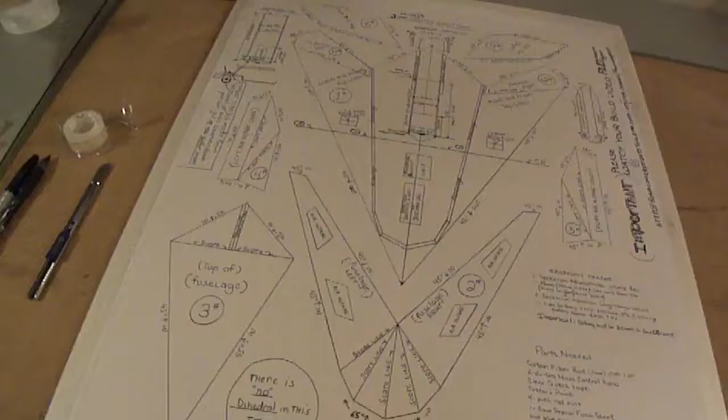Alright you guys, we're going to get busy cutting out our F-117 stealth fighter. You can use a 30mm or 28mm EDF jet.

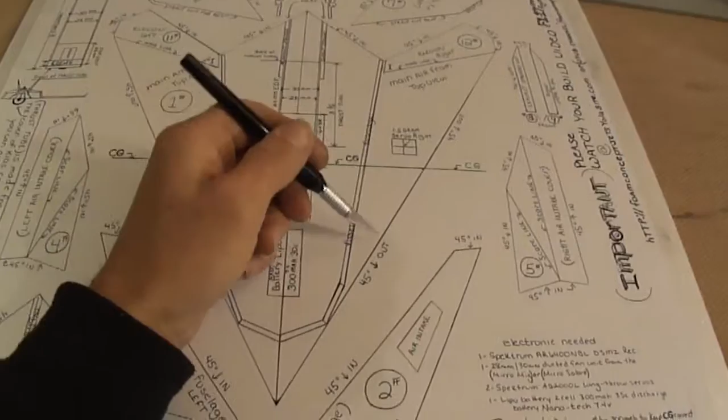I was going to go over a few things first. I started putting notations on here: 45 cut outward means you cut on your line going that way. And anywhere you see a 45 in, that means you cut in. I'll start putting this on all my plans, that way it makes it a little easier for you.

Alright, let's get started. I tape my sheet down on my foam board. Like I said guys, always use the bow, put the crown at the top. These sheets come with a little bow in them, so you want the crown at the top. You'll see one side of the sheet is smoother than the other, but I always like to put the crown at the top. It makes the plane, when you build it, have a better airfoil shape.

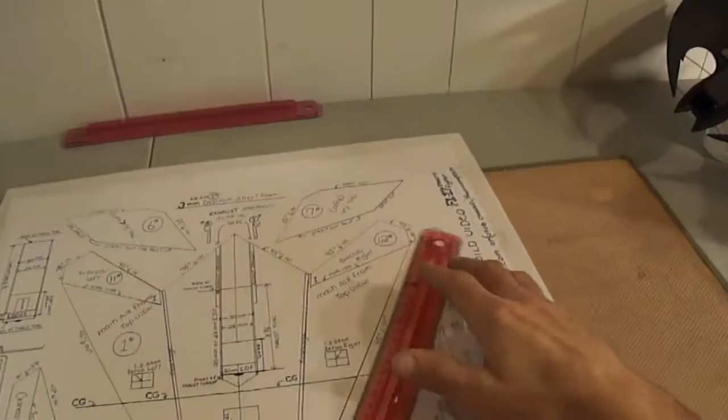Alright, let's start with the main airframe. I'll go ahead and cut this out. As you can see, it's a 45-degree cut with an arrow pointing that way, so we're going to put it on our line. Let me get a different knife.

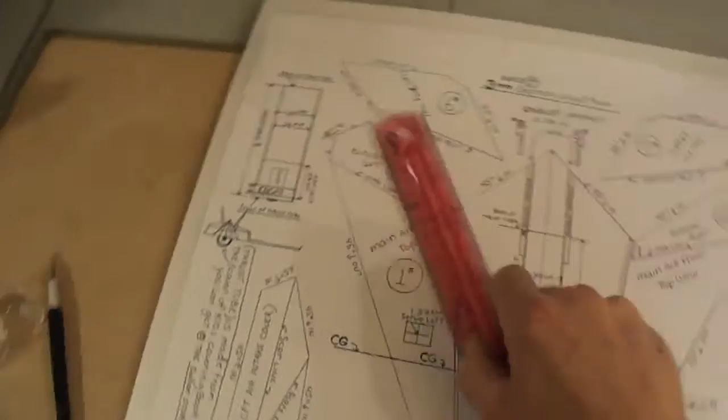I'm going to go ahead and do my 45s on the main airframe first. I numbered all the pieces. I'm going to try to get through this a little quicker than my other videos too.

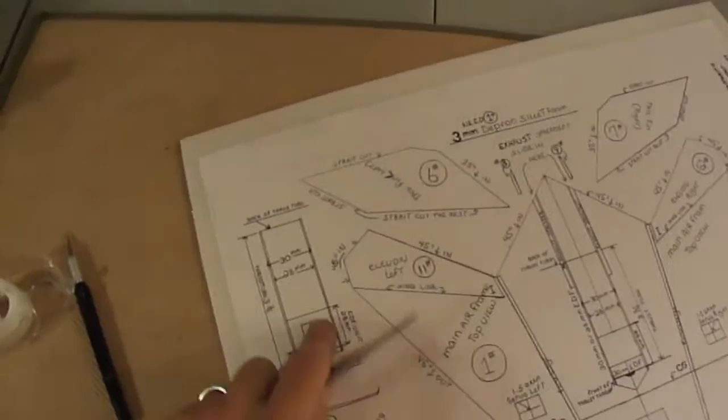Alright, for your elevons, those are 45 inward.

Turned out to be one cool jet. I love flying it.

Again guys, I'm just doing the 45 with the arrow pointing that way, so I'm cutting 45 in toward the inside of the fuselage, or the main body of the plane.

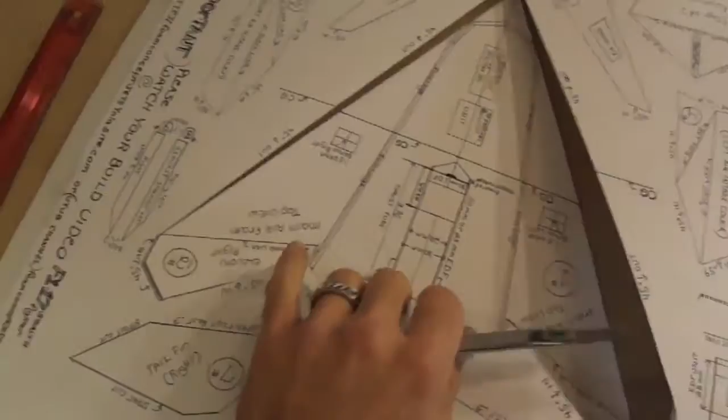Alright, so we cut out our main airframe. Just go ahead and put that off to the side.

We'll move on to piece mark number 2, which is your fuselage. Here we got a 45-degree cut in toward the piece.

And if you guys want, you can do more than the 45-degree angle on some of these. I even got it marked in some places where there's a 65-degree angle cut. You can make it 70, 75 - kind of the more the better.

Right now I'm just working on the main fuselage part.

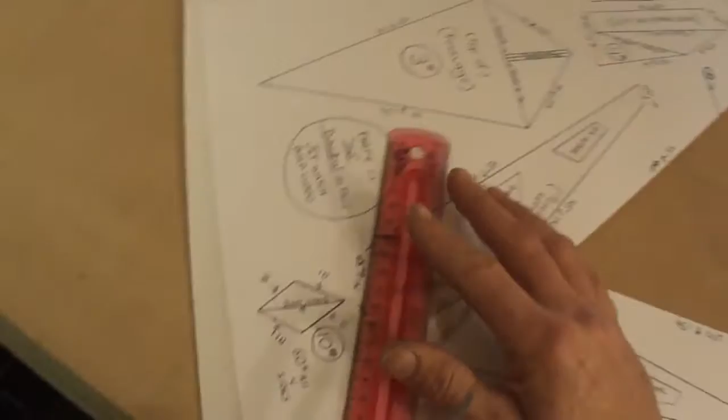Alright, now these are all on the front of your fuselage, which is kind of your canopy front end here. We're going to do 65-degree cuts, all 4 of these, angled inward. Like I said, you can make them a little more too, kind of the more the better. So if you want to go 70 degrees, that works too.

Alright, now on these canopy lines here in front of your fuselage, you're just going to want to score them. I would only score about halfway through them too. You don't have to go real deep, just a nice little score is fine.

Again, I'm just scoring all these. You don't want to go all the way through. Don't care about that paper moving, already on it. Alright, this is your main fuselage piece.

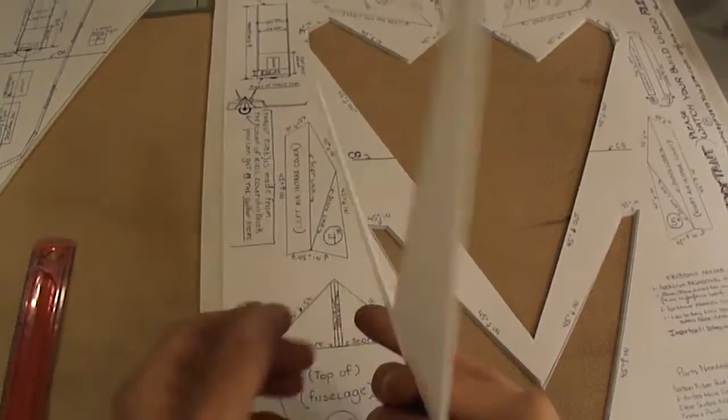Alright, now we can pull it out of here. So there's our piece we just made. Now you can take and break each one where you scored it. If you got anything hung up a little bit, just go back and give it a little trim.

There you see - a lot of guys would cut this at 45s from the back, but you're really not going to need to, because we're going to clear tape over any of these cracks that are in here.

So this is your main fuselage, which will go right on this area - actually exactly right there. Alright, so that's our main fuselage.

Let's move on to the top of the fuselage. These are all 45 cuts inward toward the piece, and you'll see it marked here, 45 in.

Cutting on the back of a carpet. It's actually just my wife's, one of her throw rugs. This stuff works really good.

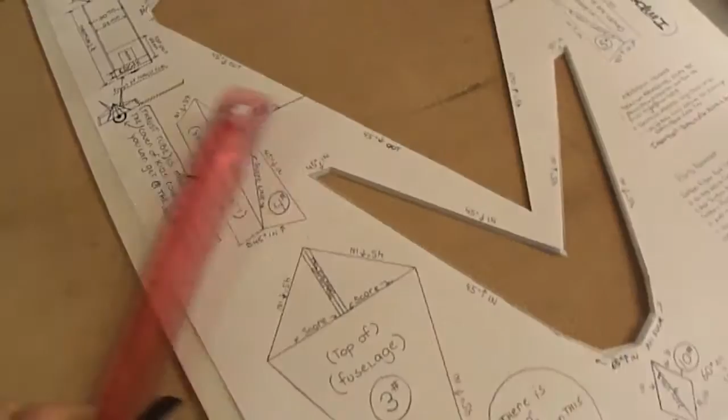So you got to go out and get one of those pads at the hobby store.

So again, we're just doing the top of the fuselage. All 45 cuts inward. Now here we have a line on top of the fuselage. Just score it, wherever I have score marked, you just want to score it. That means just go about halfway through.

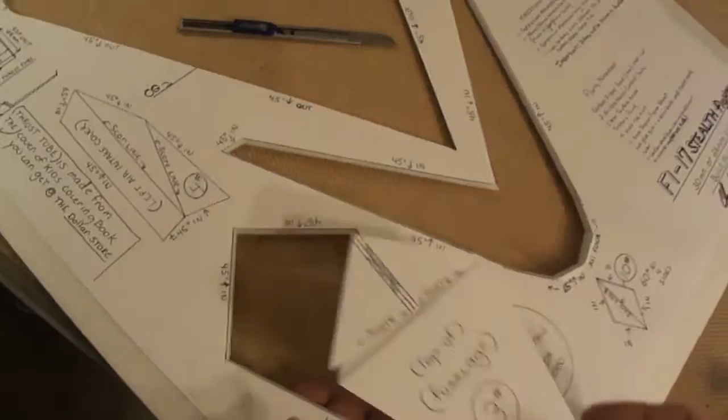Keep your plans off to the side because you'll find you'll need them at some place, like these air intakes, they go on the side of this. You don't cut those out until we attach this to the main airframe, because your piece will be all flimsy and stuff.

Alright, there's the line we just scored. I'm just going to take and snap it a little, and I'll put some clear tape across the back of that line just to make sure it never breaks in this spot. So there we go, that little score gave us that little bend.

For this piece, put our plans to the side here. There's that piece. Alright, let's move on to these.

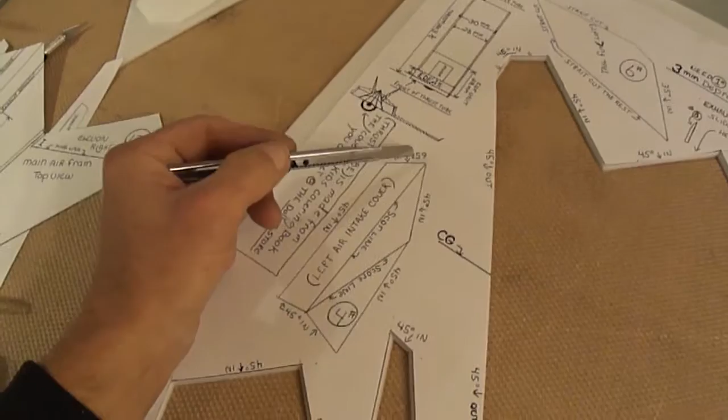Left air intake cover. Again, there's some 65-degree cuts on here. I prefer you go more, so if you get like 70 or 75, that's fine. They got to be some nice angles on them.

So these are your air intake covers, that's what I call them anyway. So here's the 65-degree line, I'm going to go ahead and put a lot more, probably like 70, 75 degrees on there. Again, on some of these 45s, if you want to give them a little more, like 50, that's fine.

Some 45s there. Alright, so this is your left intake.

I got some lines there that you got to score. Just score across those lines. Again, not all the way through, just score them.

I'll get my X-Acto knife. I find an X-Acto knife works good on a lot of this stuff, especially for building the bat wing. Gets right in there on them cuts, you can be a little more precise with them.

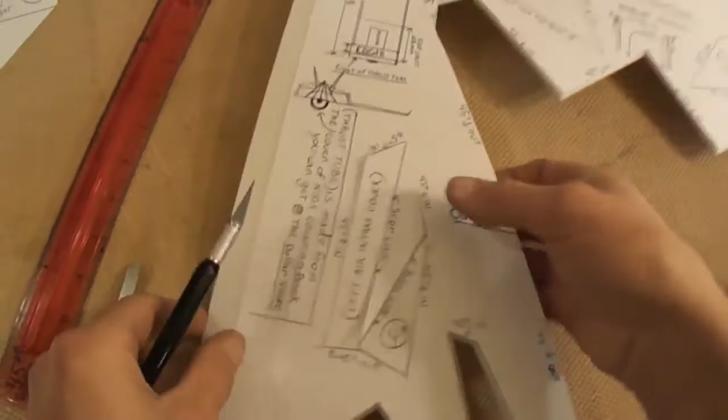So again, I'm just scoring these lines. Oops, I didn't finish my cut. Alright, there we go, there's one intake cover.

Now you can see where I scored my lines in the top of it. I'm going to take and flip this piece over, add a couple pieces of tape to the back. Again, it's on the back side because you don't want to leave those scored lines open. I just want to make this piece a little stronger from behind here. Now you can take and break them where you scored them.

Try to get this out here so you guys can see. So there we had our top piece, our main airframe. These are going to be our air intakes.

Right, let's do the other side. This is the other right hand side of the air intake. 45 inward, another 45 inward. Here's the 65, again, just do 70 or 75.

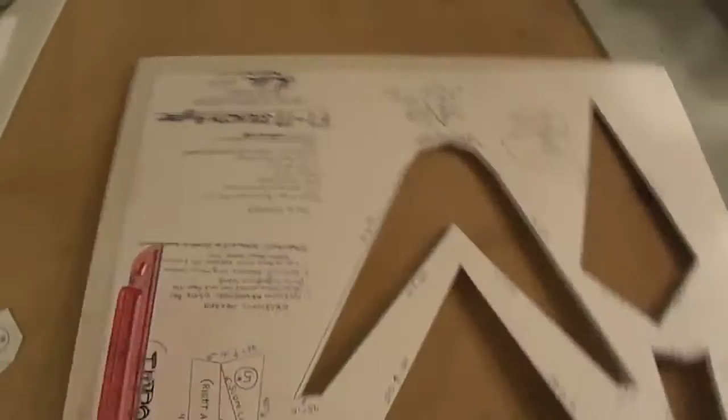I really put my blade at an angle on these ones. And another 45. And another 45 in the front. Get these front pieces 45. Oh, that's right.

Again, we're just cutting out the other side of the air intake. There's two of them.

Again, we got to score these lines. I'm going to go ahead and use my X-Acto knife, it's a lot sharper and it does a more precise job.

Again, let's take a look, now you can see where this is going to break where I scored it. And you're going to want to take and flip your piece over, put some tape on this back side, keep your piece nice and rigid from the back.

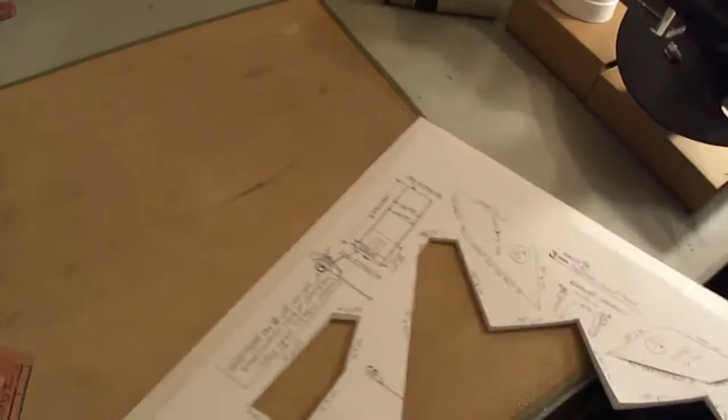Another straight cut. Here's a 35-degree angle cut on the bottom of these stabilizer fins, if you want them to be angled slightly outward once you install them on your jet, so I'd just go less than 45 on that. Another straight cut in the back.

Fin. Let's knock this other one out.

And the rest are just straight cuts on these tail fins. There's only one 35-degree angle cut on the bottom of them. The rest are all just straight.

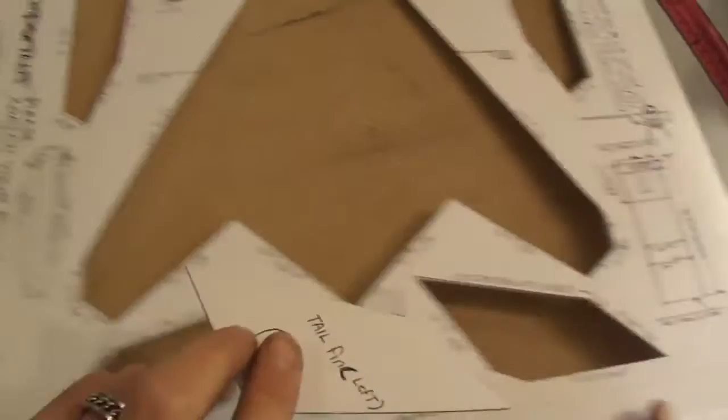Yeah, you guys are going to love flying this jet. It is awesome. Alright, so there we cut out all our pieces.

Main airframe, main fuselage, top of the fuselage, left air intake, right air intake, and then our tail fins.

Oh, we got our little exhaust spreaders. They're going to go in the back, sliding in through the back of the jet to keep open the exhaust in the back.

I'll just hurry and knock these out real quick. These are just all straight cuts.

Yeah, I find it's actually easier to build these jets than to try to put the plans together for them, and then to try to get all these different angles and dimensions. I try to make it in one piece that can just fold out for you guys.

Again, these are just what's called exhaust spreaders. They're going to spread out the exhaust back here, and they add rigidity to your tail fins in the back.

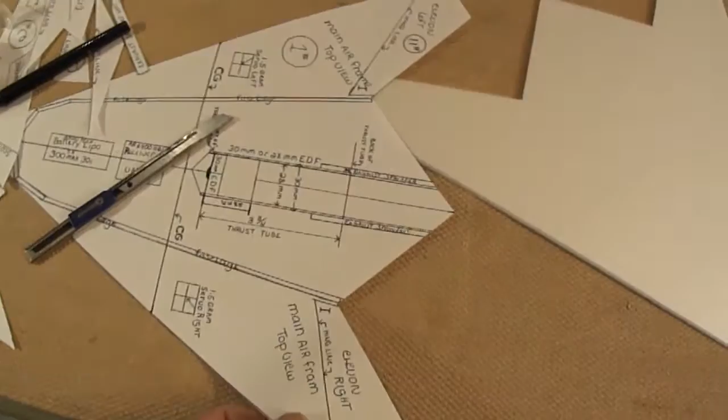Cut out these elevons, just going to take and use my scissors. This is a hinge line here for your elevons.

And I'm just going to use one elevon because that's all you really need. Again, you can mark this the top of your airframe because then you know it's got that bow in it.

As you can see from the piece being bowed, it's still holding that bow. So I just mark it top.

Take your elevon over here, lay it on there. I just mark my corners. You can use the same one, just flip it over to the other side.

Lay it on there nice and match it up. You want your elevons to be the same size. Just marking my corners.

Alright, come back in here with your ruler.

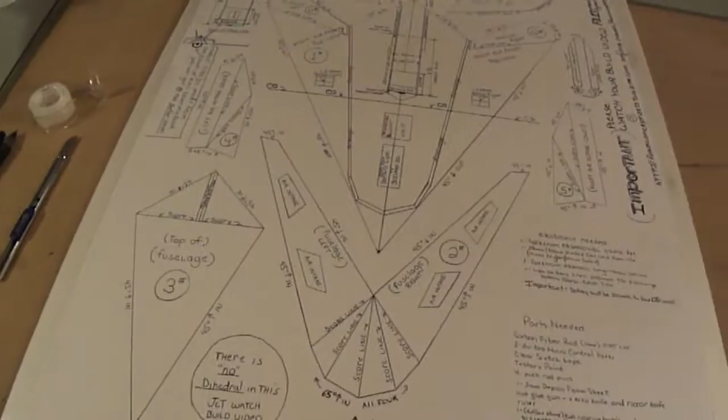So again, I'm just going to attach everything using clear Scotch tape. Alright you guys, we're going to get busy cutting out our F-117 stealth fighter. You can use a 30mm or 28mm EDF jet.

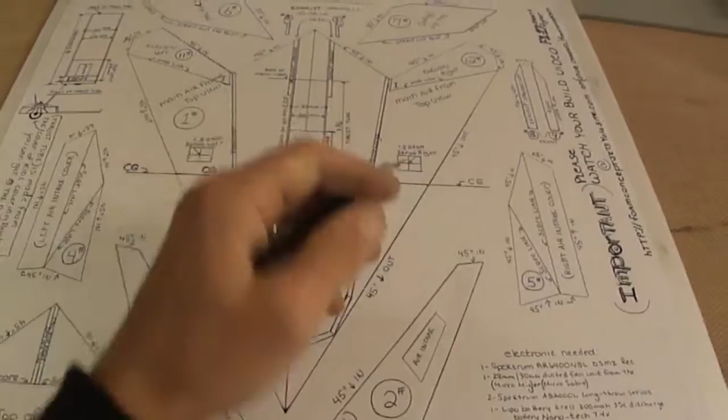I was going to go over a few things, which is I started putting on here '45 cut outward.' That means you're going to go on your line that way. And anywhere I got it, you'll see this is a '45 in.' That means you cut in. I'll start putting this on all my plans, that way it makes it a little easier for you.

But alright, let's get started. I tape my sheet down on my foam board. And like I said, guys, always use the bow. Put the crown at the top. These sheets come with a little bow in them. So you want the crown at the top. And you'll see one side of the sheet is smoother than the other. But I always like to put the crown at the top. It makes the plane, when you build it, give it a better airfoil shape.

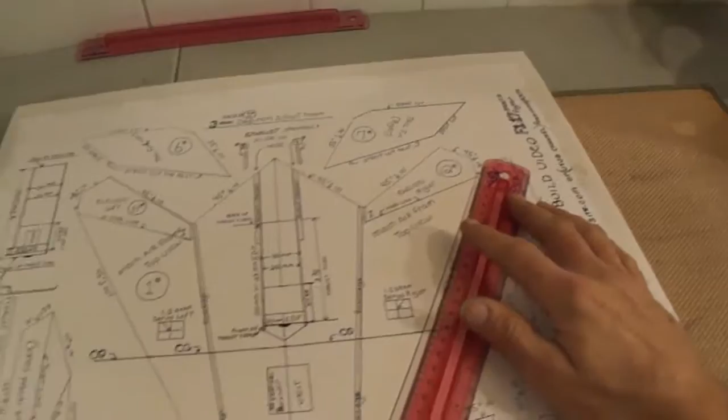Alright, let's start with the main airframe. I'll go ahead and cut this out. As you can see, it's a 45-degree cut. Those two. Alright, for your elevons, those are 45 inward.

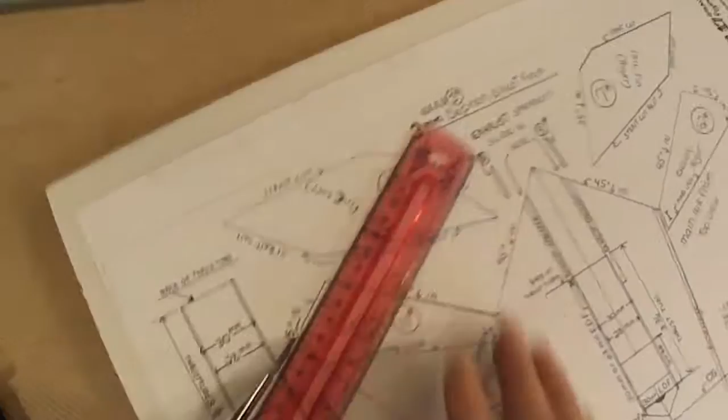This turned out to be one cool jet. I love flying it.

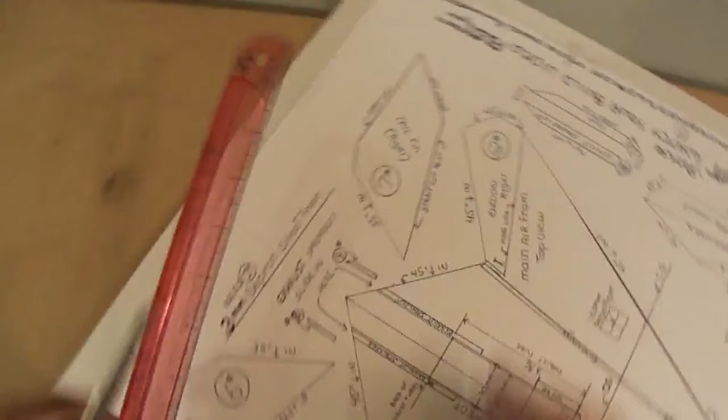With an arrow pointing that way, so we're going to put it on our line. Let me get a different knife.

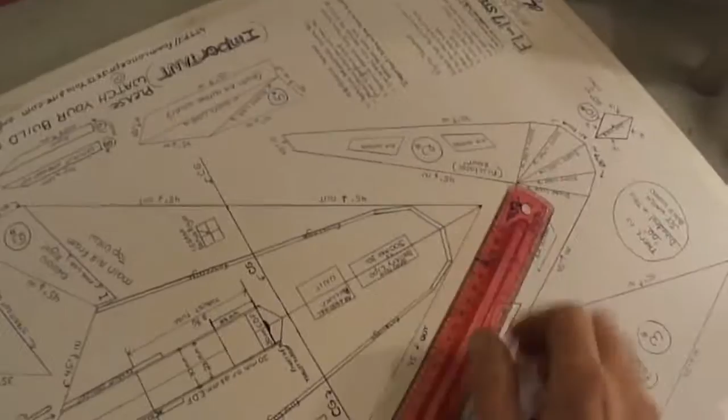I'm just going to go ahead and do my 45s on the main airframe first. I numbered all the pieces. I'm going to try to get through this a little quicker than my other video. Again, guys, I'm just doing the 45 with the arrow pointing that way, so I'm 45-ing it toward the inside of the fuselage, or the main body of the plane.